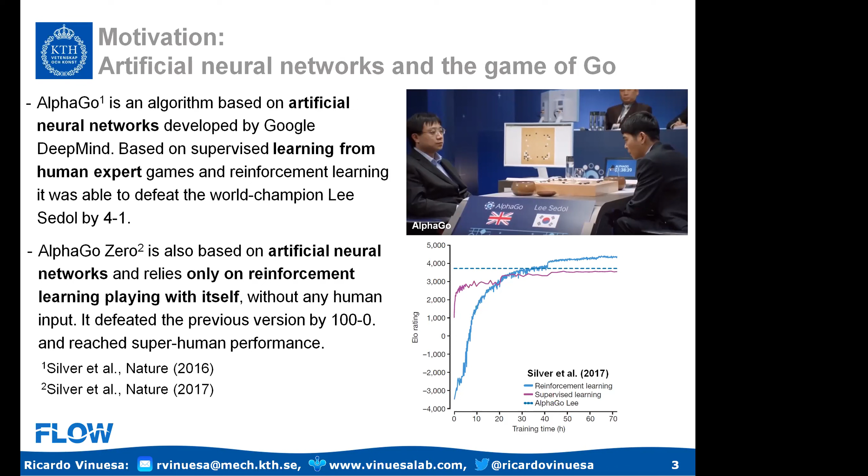So in less than 2 days playing against itself, this algorithm was able to achieve superhuman performance. And what is more interesting is that it did not get any information from human games, so it was able to develop novel strategies basically on its own. It's actually quite promising in the context of machine learning that we can get many different areas that can have positive benefits from this technology.

We have a recent review in Nature Communications from a couple of years ago where we looked at all the SDGs, the Sustainable Development Goals of the United Nations, to see what was the potential, both positive and negative, of machine learning and deep learning methods. We saw that 79% of the SDG targets could be positively affected by AI, where the environment has quite positive potential, and perhaps society can have some negative effects, which we are all well aware of.

So there is quite some potential in a very wide range of areas. The SDGs are very broad.

In particular, I would argue that the issue of interpretability is essential. Deep learning models, as many of you are aware of, are not interpretable. They're essentially black boxes where you get inputs and then you get outputs, but it's very difficult to really know what's going on inside.

And what we advocate for is the usage of interpretability methods. There is some work, and you can see we have a paper in Nature Machine Intelligence from last year where we look at these things. You can also refer to Cranmer and others, where you can actually get from the structure of the network symbolic equations that give you a pretty good idea of what the network is actually doing.

And if you're going to use deep learning methods for applications that affect you in your daily life, then it should be interpretable, because otherwise you are in trouble, right? This, of course, has important implications in design. Same thing if you want to control the flow, or if you want to design an algorithm to modify properties of the mechanism that you're working with, then you want it to be interpretable.

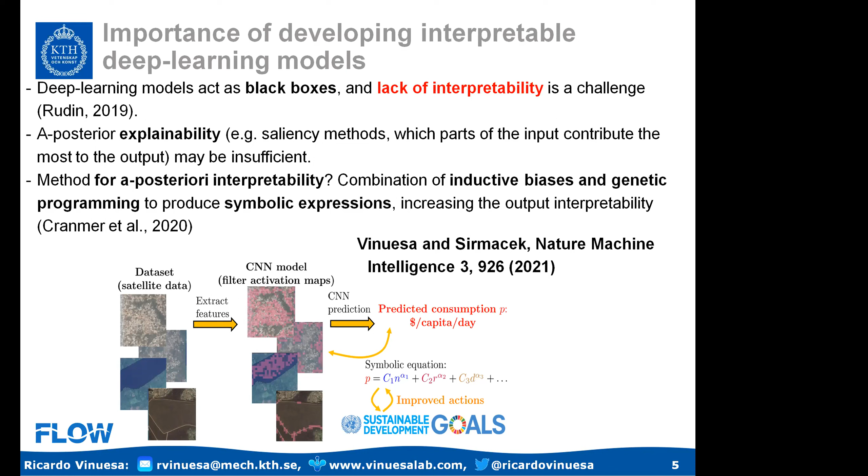So essentially, if you look at fluid mechanics, which is the main topic of today's talk, there are many areas where machine learning can really help. There is the pioneering work of Milano and Koumoutsakos 20 years ago, where they were able to model the near-wall region of a turbulent channel with neural networks.

There is work on subgrid-scale models for LES. There is work on definition of inflow and boundary conditions with machine learning, which can potentially make your simulations much more efficient. There is quite some work as well on turbulence modeling, quite interesting, and I will also get back to it later in the talk.

You can use what is called PINNs, physics-informed neural networks, where you are using the governing equations, the Navier-Stokes equations, to enhance your predictions and augment the data that you are collecting. And also in the context of flow control, there are many areas that are quite prominent, where machine learning can really give us alternative solutions and help us get better performance.

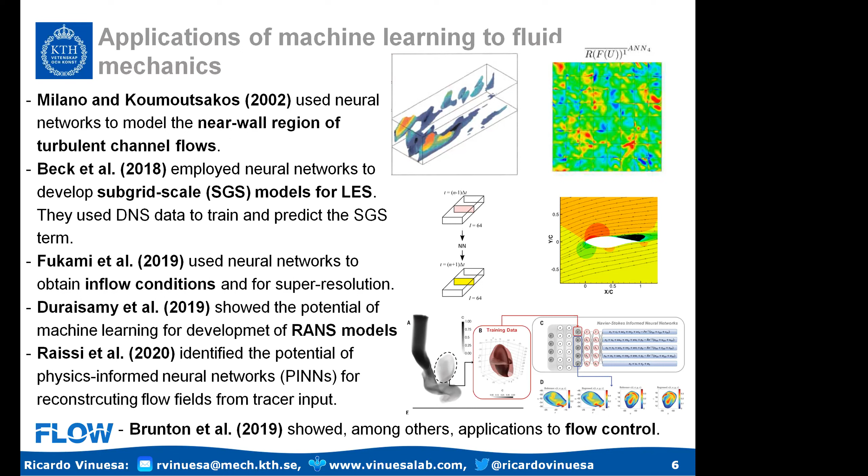So here, what I will be discussing today is a number of problems within fluid mechanics that are related to control and modeling, where deep learning really helps us, and it can outperform traditional methods that have been deployed for this type of application. One of them is what we call non-intrusive sensing.

Non-intrusive sensing, what it implies is that you have a flow. Let's imagine that you have a turbulent channel, and this is the wall, and you want to measure in the channel without disrupting the flow that you have in a certain region. One possibility to do that is to measure at the wall, because the wall is not intrusive, and based on the wall measurements, you can predict what happens above the wall, right?

And that's basically, why is that important? It's important for different reasons, but one of my motivations is closed loop control, because if I know what's happening above the wall, then I can design an algorithm that can control the flow better. And it's much easier to measure at the wall than to measure above.

So what we're going to do is use some quantities that we can measure at the wall, and we're going to use deep learning methods to predict at different distances from the wall, which will, in a way, separate different types of scales that are going to be relevant to different types of control.

By the way, the details of this you can see in Guastoni and others. So this is the reference.

Essentially, what we want to do is obtain DNS data. We're going to conduct a direct numerical simulation. This example is a low Reynolds number, 180 open channel. For simplicity, we only have the dynamics of one wall, but this will apply also to a normal channel. We have the symmetry condition at the upper boundary of the domain, and we're going to use this DNS data to train a deep learning model so that we can do non-intrusive sensing prediction.

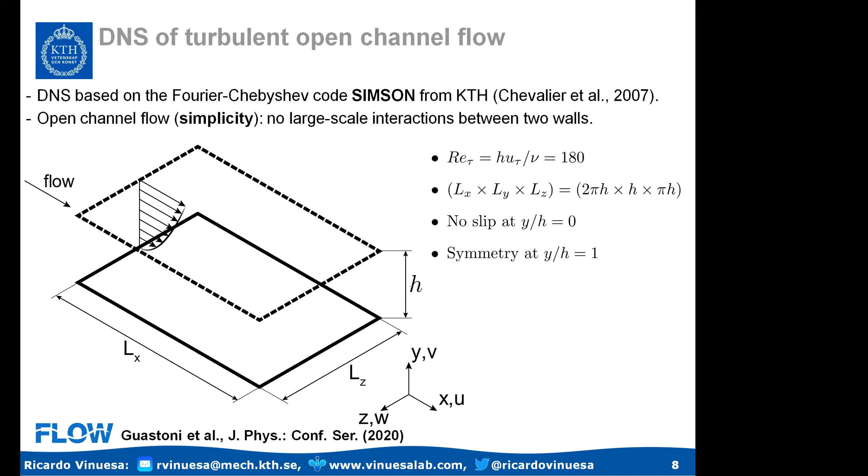So in practice, what we do is basically choose a deep learning model that is going to be beneficial to computer vision, because turbulence, for the ones who work with turbulence, is highly structured. You have a range of scales, a cascade of energy transfer. There is a hierarchy there, and very well-defined structures that one can try to exploit to make predictions in the flow.

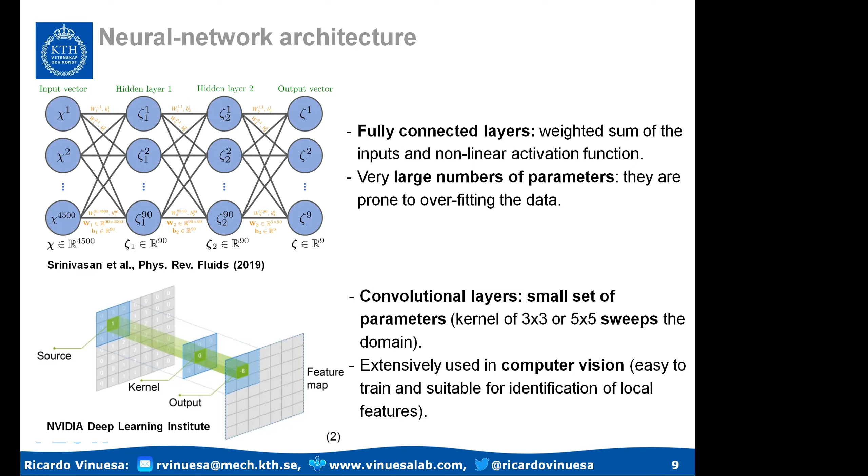Going back to our example, we're going to take several quantities at the wall, which will be displayed over here. In fact, we're going to take 3 quantities at the wall: the streamwise and spanwise wall shear stress, plus the wall pressure. And we're going to predict, at different planes above that wall, the 3 velocity fluctuations: the streamwise, wall-normal, and spanwise velocity fluctuations.

The connection between those 2 planes will be done through a convolutional neural network first, and then I will tell you about more complicated models.

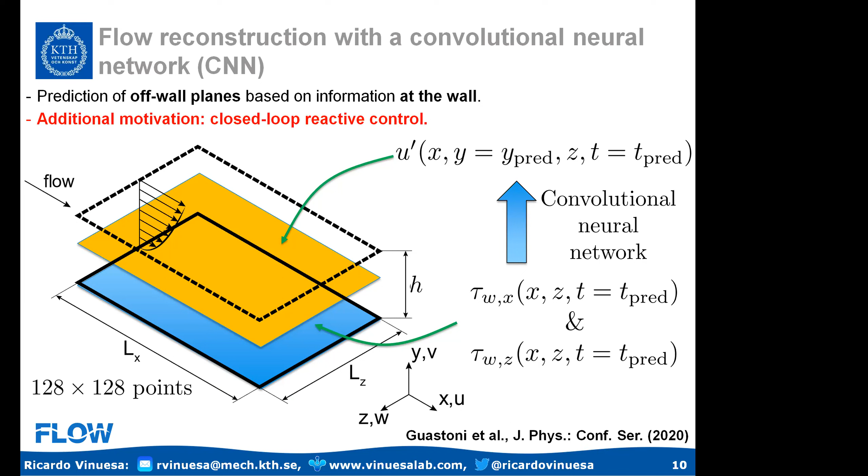So how does this network work? What we have is an input of 3 channels because we have 3 quantities. These inputs are images taken from the DNS, and depending on the Reynolds number—for a low Reynolds number you have 128 square grid points, but this can go up very quickly as you increase the Reynolds number. The output is also 3 images with 3 channels, because you have 3 quantities that you want to predict. I take an input which is an image, and the output is another image, and all of those images have features that are going to be picked up by the network.

So we have in this example 6 hidden layers. We have many different architectures, but I'm going to show you this one now. These numbers represent the number of feature maps that you have on each layer. So what this means is that in the first filter, I have a depth of 2 or 3, depending on how many input channels, and I apply a total of 64 filters because I want to get 64 feature maps on that first convolution.

What is interesting from this? Each of those filters or feature maps are going to be identifying different features of the input. For example, in the first layers, we could be looking at edges, circles, or shapes that are very simple in that input.

And as I go deeper into the network, I'm going to hierarchically build more complicated features. I'm going to take those lines and circles and build more difficult shapes based on the simpler ones, because convolutional networks are very good at learning hierarchically. So you always get that distribution: at the beginning, very simple, abstract things that progressively get into more complicated things.

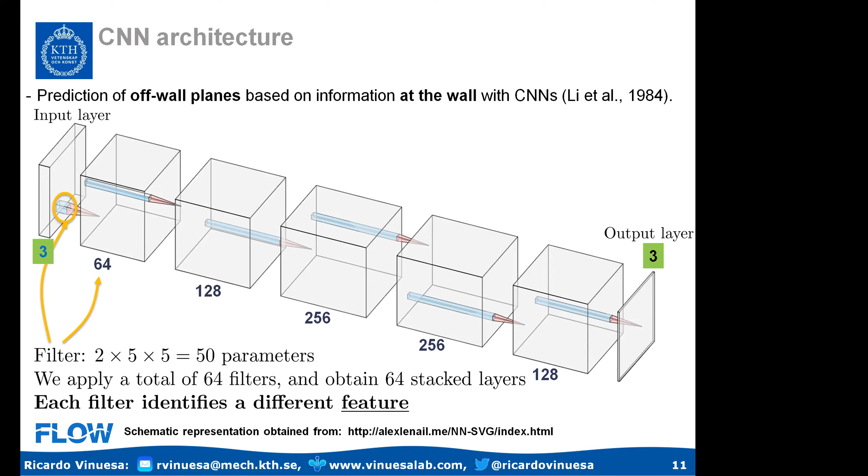And that's a little bit how one can interpret the predictions of the CNN, the convolutional neural network.

So one example we have is at Reynolds tau 550, again a turbulent open channel. It's not a very high Reynolds number, but the advantage is that it's high enough to still have a scale separation. So you actually have meaningful turbulence, and therefore you can see how the predictions change when looking at the near wall region versus the outer region, and how those different scales are interacting there.

All these results are published in JFM, so you can go to Guastoni and others to see everything we have there. On the left, we have the three quantities at the wall: the two wall shear stress components and the wall pressure. And on the right, we have the three velocity fluctuations at different wall normal locations, different distances from the wall.

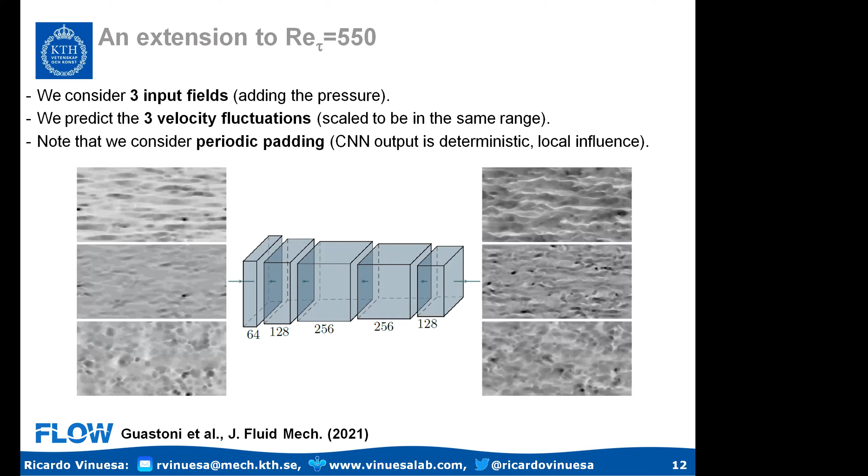So we have two methods to predict. The easiest and most straightforward approach is to use a fully convolutional network. I take an image, which is the wall, and directly predict another image, which is the plane above the wall. That can be close to the wall or far from the wall, just using a purely convolutional neural network.

But we have also developed another method, based on first doing a POD, a proper orthogonal decomposition. When you do this, you separate the spatial temporal information of the flow into spatial modes, which are fixed, and temporal coefficients. Then if you use this FCN-POD method, you're only predicting the temporal coefficients, since you already have the spatial information. And that for some cases is helpful.

We're going to look at it in a second, to see for which cases the FCN is helpful, and for which cases the FCN-POD actually gives better performance. You can find more information about the FCN-POD in this reference.

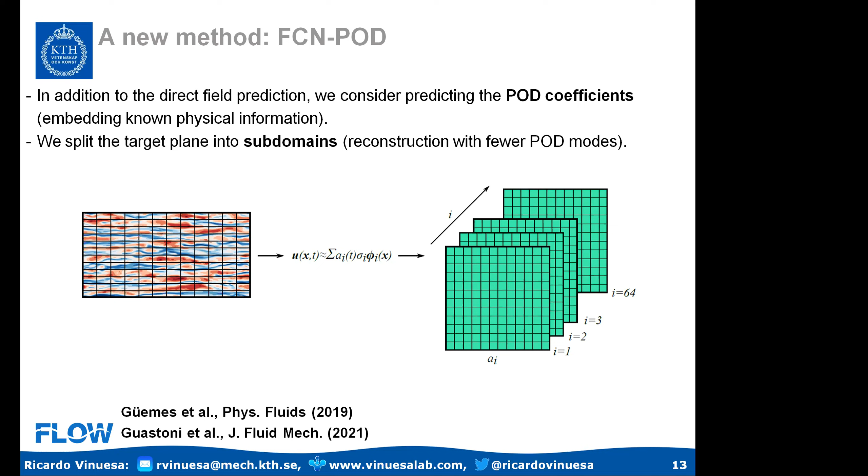You basically have very large scales which have their feet on the wall, and that footprint is essentially a linear process. So if you have a linear method to predict from the wall what happens above the wall, you're going to be predicting the superposition. But there is another phenomenon, or number of phenomena, which have to do with modulation. And the modulation is highly nonlinear and has to do with interactions among different frequencies, because it's a multi-frequency phenomenon. That cannot be predicted by linear methods.

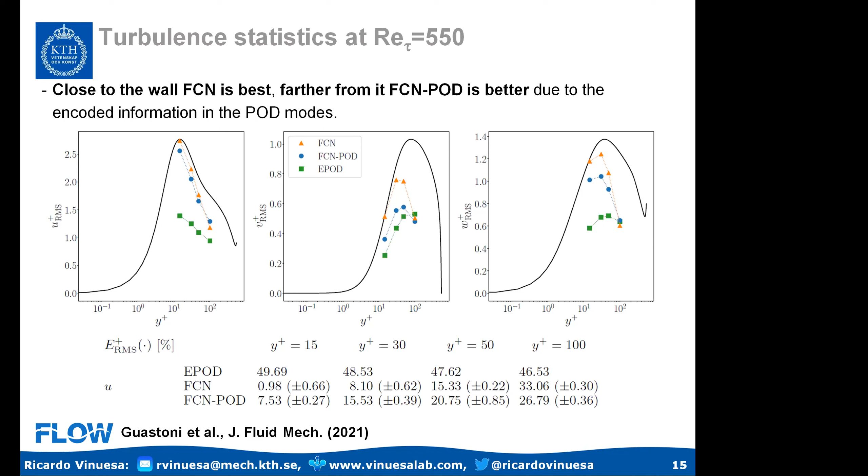Now, something I think is quite interesting is what we call transfer learning. Transfer learning means you can use what you've learned in one scenario, one problem, and use it in another problem. You can transfer that stuff that you have learned. We have two examples of transfer learning.

The first one is at low Reynolds number, at Reynolds tau 180. We train one network to predict at y plus 15, so basically from the wall to very close to the wall. Now we want to predict at y plus 50, farther away from the wall.

What we can do is take the weights of the network we used to predict close to the wall. We take the first three layers and freeze them, using the same weights for 15 and 50, and only train the three last layers.

Why do we do it like that? Because the first layers of the network identify more abstract, simpler things, basically smaller scales, while the last layers look at more complicated, larger scales. So here we have the underlying assumption that the small scales are similar close and far from the wall, while the larger scales are different.

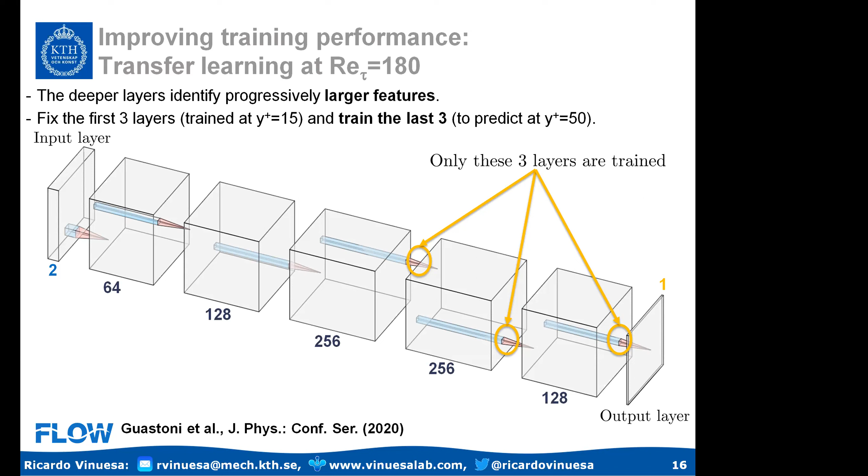If you compare the results with the case where the y plus 50 network was trained completely from scratch, we can get the same level of accuracy, the same level of error, but reduce the training time by a factor of more than 4. So by transferring what we learn close to the wall to far away from the wall, we can save a lot of training time and training data, which is another important aspect of deep learning applications.

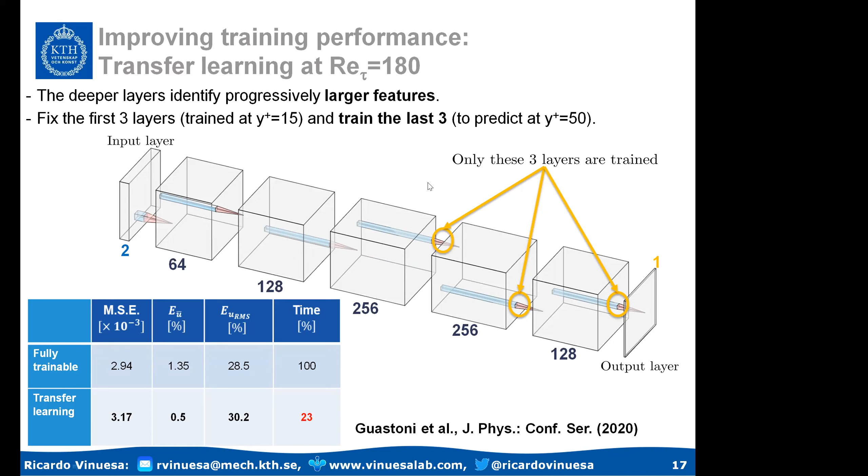We have another example of transfer learning, which I think is the most interesting one. We do the analysis at Reynolds star 180. We train a network, and now we want to train another network to predict at Reynolds star 550.

What we can do is take all the weights from the Reynolds star 180 case, and start the training at 550 not from random values, but from the values we had at 180. So in a way, I'm already closer to a good solution, and then I can see how that affects my training process.

If we compare different characteristics of the training data set, the idea is I can obtain the same results when I transfer the weights as when I start from random weights, but I can reduce the training time again by a factor of 4. So basically, I can use 4 times less data at higher Reynolds numbers for the same prediction.

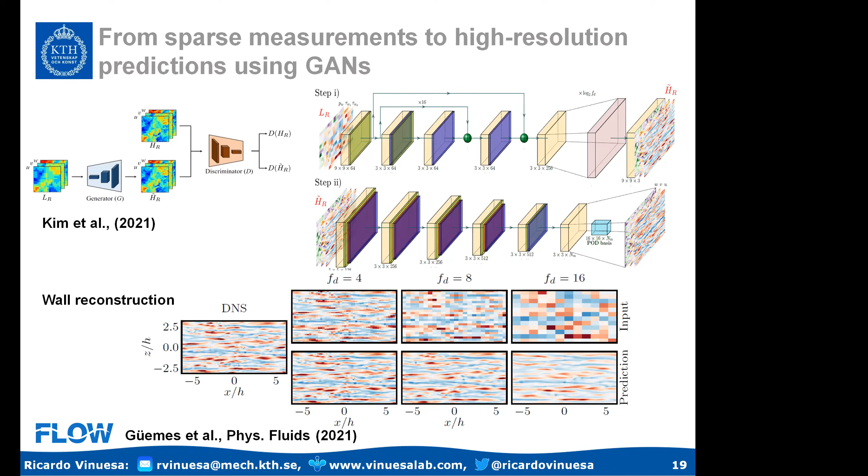This is actually quite interesting, that from something like that I can obtain this. It's quite encouraging. By the way, all of these results you can find in Güemes et al. — this is a paper from Physics of Fluids that we published last year, so all the details of the architecture are there too.

Once again, of course, I have a lot of attenuation of the fluctuations, but I know where the large scales are, where the streaks are located, their spacing and their sizes. So it's an interesting prediction of the flow, which I can use for flow control eventually.

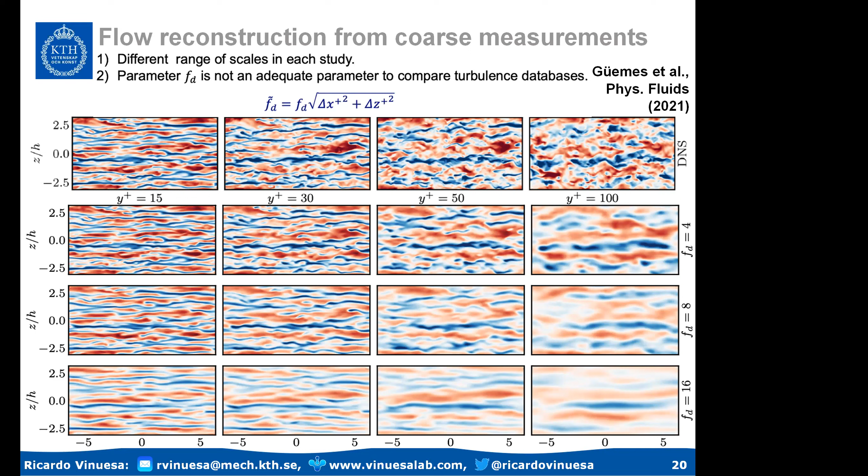So if you want to predict with very coarse inputs, then GANs is a good approach because that allows you to obtain some super resolution.

Now, the next application I'm going to talk about is the opposite prediction. So far, I've explained how we can take information at the wall and predict what happens above the wall. What I want to do now is take information above the wall and predict what happens closer to the wall. And why is that interesting?

There are several applications where that's interesting, but one is the definition of off-wall boundary conditions, which is quite popular in climate simulations and things like that. Those who do DNS, or generally turbulent simulations, know that most of the resolution is devoted to solving the physics close to the wall, because that's where you have the smallest scales. But not only that, that's also where you have most of the production at moderate Reynolds numbers. But if you can, knowing what happens over here, predict what should be happening here, and use that to set a boundary condition, then in principle whatever happens below that point can be saved. You can have a much computationally cheaper simulation.

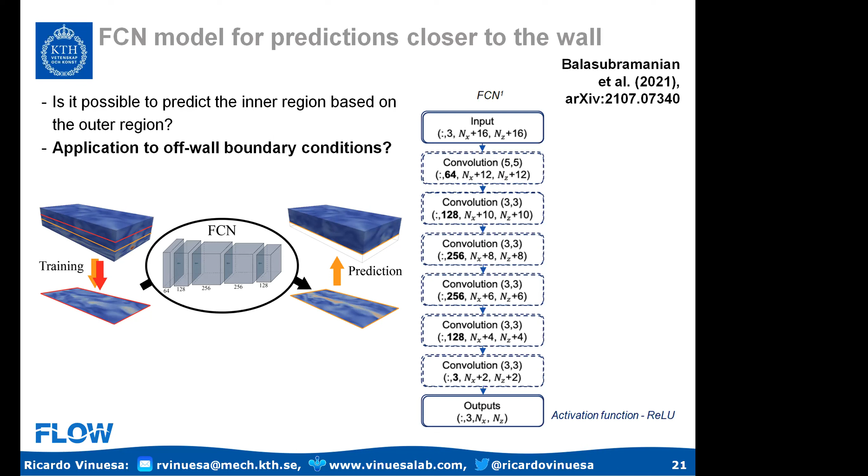The first one is the receptive field. When you're predicting close to the wall, you're using small things as input which fit in your receptive field. But when you predict far away from the wall, you have a very large scale structure, and your receptive field represents only a small part of that input, so I cannot very effectively exploit the initial information I have as input.

The second problem is the problem of missing scales. When you're predicting from the wall, it turns out that the large scales have a footprint here that in a way gives you information about modulation, about superposition. So you know a lot about these larger scales when you're looking at the wall. But when you do the opposite, when you try to use this information to predict what happens closer to the wall, you don't have that information. So you're predicting with less information something richer in physics. It's a bit more challenging.

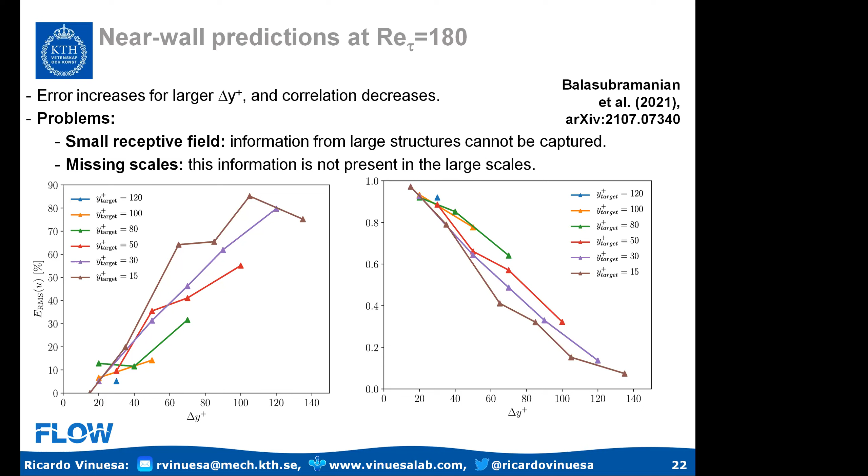What you can do, if you look at our predictions - and this is, by the way, inspired by work from Mizuno and Jiménez, where they did this simply by rescaling - they have the plane here, and they just rescale to see what should be happening over here. We try to do that, but with convolutional neural networks.

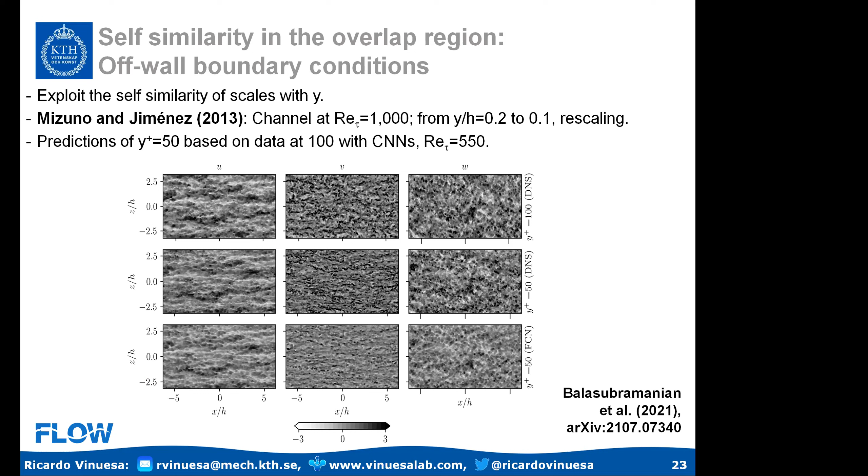If you look at the results, this is my input plane at y plus 100. This is the reference at y plus 50, so this would be the boundary condition plane. And on the third row, you have the predictions. You can actually see that the predictions are pretty good in principle - I'm able to construct most of the fluctuations, most of the details of the structures. But still, to make this work in a simulation, you would require a very detailed result at that input plane, which is not so straightforward to achieve.

But to do it in the context of boundary conditions, one needs to find alternative approaches. Some of those approaches we're investigating include using, for example, max pooling in the first layers, because that can bypass the problem of the small receptive field, and you can maybe use a more GANs-oriented approach to reproduce the small scales missing in my predicted fields. So those are directions that can be explored. All the details of this can be found in this paper on arXiv, so this is something you can access if you're interested. It's a direction that is quite promising for deep learning in order to enhance computer simulation.

Another area which I think is quite interesting when using CNNs is modal decomposition. If you do POD, the proper orthogonal decomposition, you obtain a linear reconstruction of the flow where those modes are actually orthogonal.

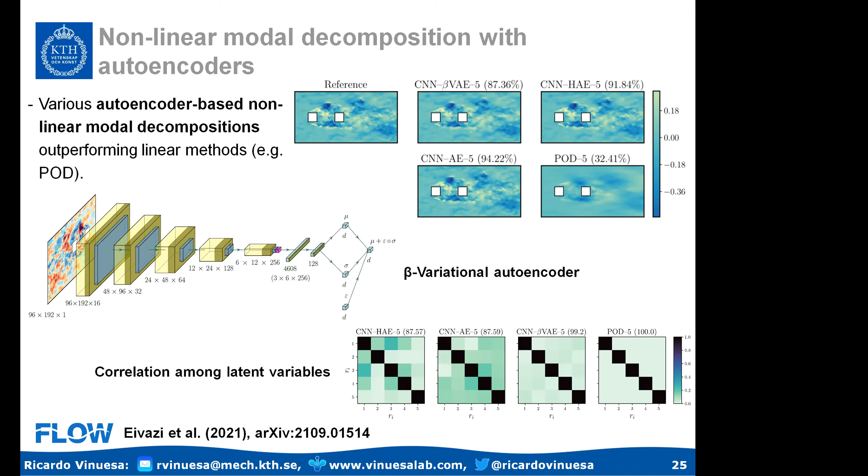This has quite some potential in the context of model reduction, because turbulence is very complex, so you always want to reduce the dimensionality. For reduced order models, it can really help you develop more efficient control strategies later on. So this is something that can be quite promising.

And then we have the area of PINNs, physics-informed neural networks, where we also have some collaborations with Esteban and some of the people attending the talk. So it's another interesting area, and we have an article where we apply PINNs to RANS, to Reynolds-averaged Navier-Stokes equations.

So what do we do? We take the 2D RANS equations, the steady version of the RANS equations, and we include the Reynolds stresses without any model. We just put the Reynolds stresses there because we want to avoid the inaccuracies associated with eddy viscosity models — we want to be able to just solve the RANS equations and see what's the contribution of the Reynolds stresses.

The advantage of PINNs with respect to other numerical ways of solving the equations is that you don't need to solve the very fine gradients that other approaches require. This is because PINNs are based on automatic differentiation, embedded in the training process of the network itself. When you train, you're minimizing the loss function with respect to the weights in your network, so you need partial derivatives and the chain rule to do the training.

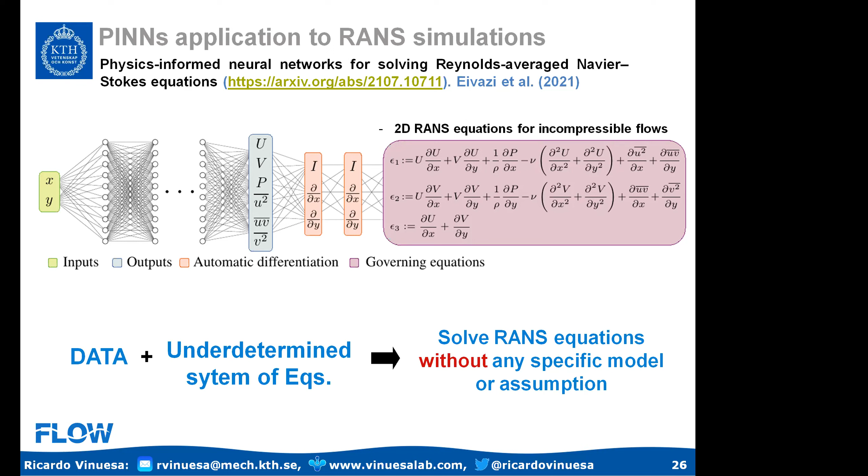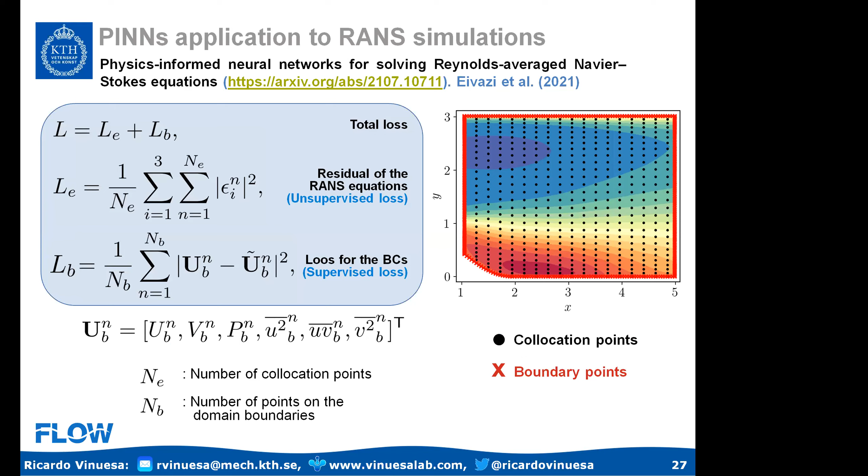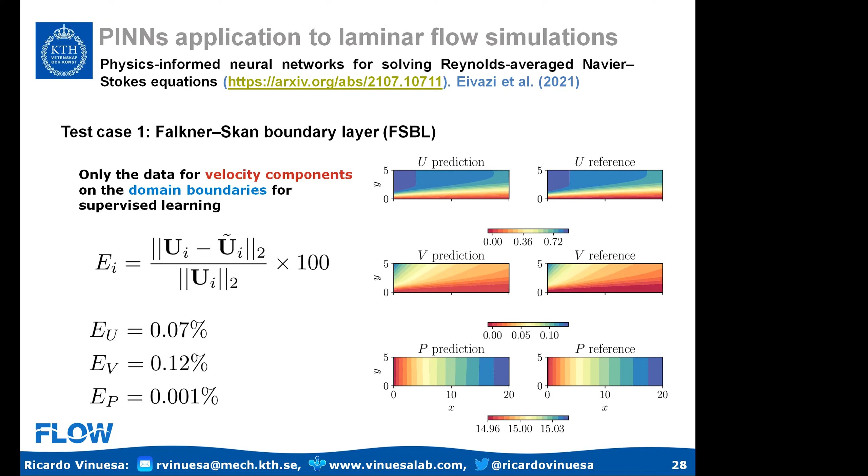You can apply this methodology to a wide range of cases of varying complexity. For example, starting with a simple Falkner–Skan boundary layer, which is a laminar boundary layer you can solve very easily, you can compare the reference and the prediction of the mean quantities and get less than 0.1% error. So a trivial case can be trivially solved with PINNs, which is a good starting point.

But more interestingly, you can go to turbulent cases. This is a zero pressure gradient turbulent boundary layer up to Reynolds theta 7000. This is a DNS, a very detailed simulation. You can see the computational domain here.

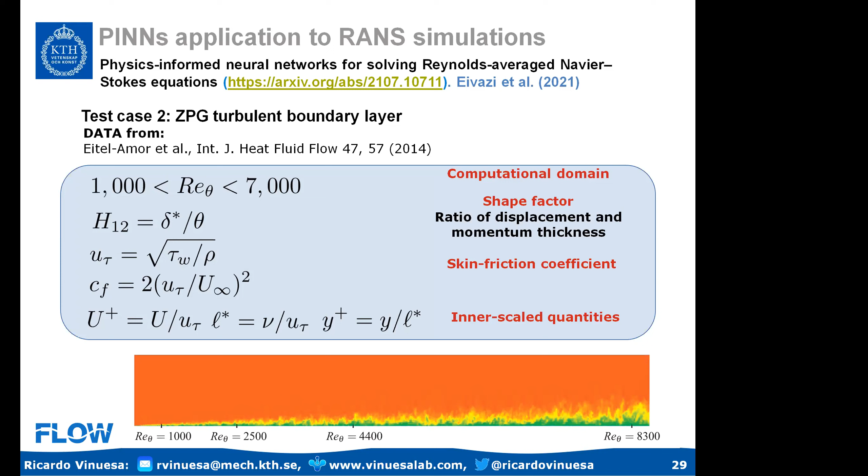Because we are using the steady RANS, what we can predict is the turbulence statistics, not the instantaneous flow. We're actually working now on unsteady PINNs, and we have quite some progress being able to predict the flow instantaneously with PINNs, which is pretty interesting. But for now, we're going to focus on the RANS results, the steady RANS results, which are the turbulence statistics.

For a ZPG turbulent boundary layer, here's the comparison between the reference of U, V, and the Reynolds stress, and the prediction. The mean flow has 1% error, which is pretty good. Even in the Reynolds stresses we have less than 10% error. You can compare the inner-scaled velocity profiles and the Reynolds stresses here. In principle, we can predict quite well.

A turbulent boundary layer with zero pressure gradient is a complicated flow case, and we get more accuracy than you'd be able to have in a RANS-based simulation. The key is that we are not modeling the Reynolds stress; we are just solving it as part of the equation.

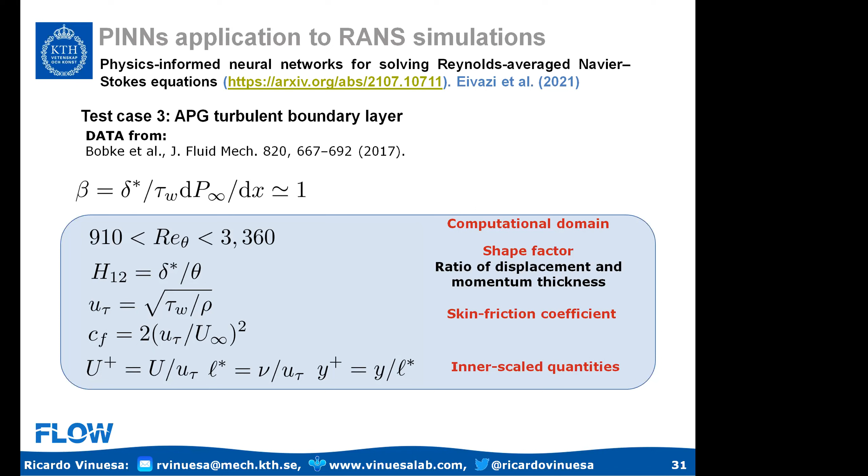More interestingly, if we go for more complex cases, for example a turbulent boundary layer with a pressure gradient, you can see the information in Bobke and others in JFM. We have picked a boundary layer with a constant pressure gradient, so this is near equilibrium, and the Reynolds theta gets to 3000, which is reasonably high for numerical data.

This is a more challenging case because the flow is decelerated, so you get much more complex streamwise development. The mean flow has an error of 0.3%, so again we nail the mean flow and get very good representation of the skin friction and shape factor. Even the Reynolds shear stress we get with less than 10% error, which is a quite remarkable result because this is now a more complicated case.

This is not something you can so easily simulate with an industrial RANS. It's quite interesting if you compare the streamwise development of the boundary layer, even the Reynolds stresses, because we can characterize pretty well the turbulence quantities and nail the Reynolds shear stress. This is already a more complicated flow case, but we can go for even more complex cases.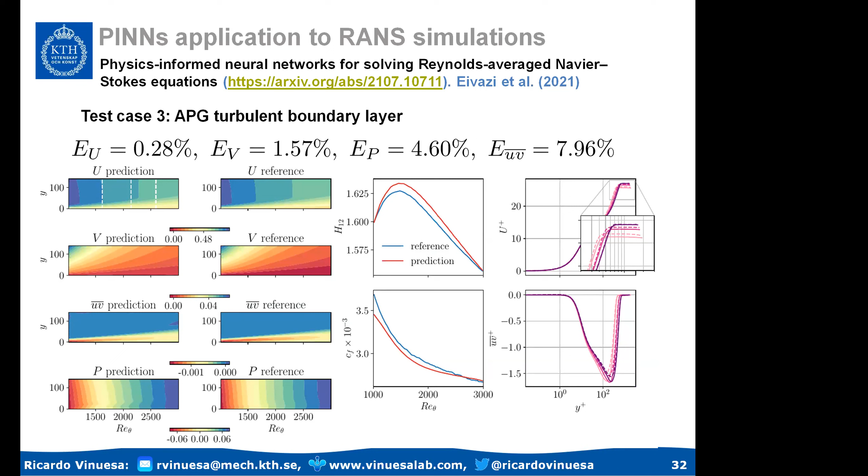This is the turbulent boundary layer on an airfoil, a NACA 4412 section. You can see the details of the simulation in Vinuesa and others, published in the Journal of Heat and Fluid Flow some years ago. We have a database of DNS-like resolution up to Reynolds number of 1 million, which, by the way, is what you can achieve in most wind tunnels—so we can actually do DNS at quite high Reynolds numbers. We've picked a case of Reynolds number 200,000, where you can see the complexity of the flow we are trying to model.

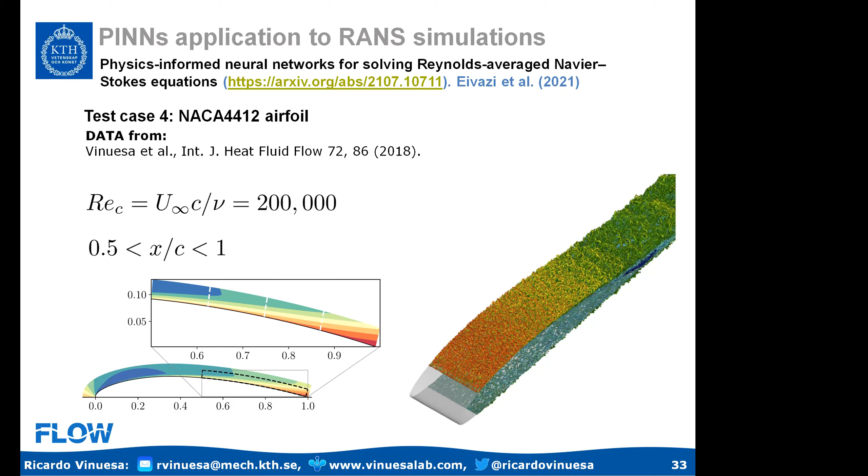This is something that with industrial RANS starts to get more challenging—it's not clear you'll be able to predict this reasonably well with industrial RANS. What you see here are the various Reynolds stresses. In the mean, we get 1.5% error, so we're able to predict extremely well the mean flow. And even the Reynolds stresses, with around 10% error, which is quite interesting, because with industrial RANS we would not have a chance to get the Reynolds stresses nearly as close as what we get here.

We have a little bit of over-prediction in the outer region, because that's where the most complex physics is taking place. But still, we're able to get pretty good Reynolds stresses, again at the cost of something you can run on a laptop during a coffee break. This is something that is quite computationally cheap.

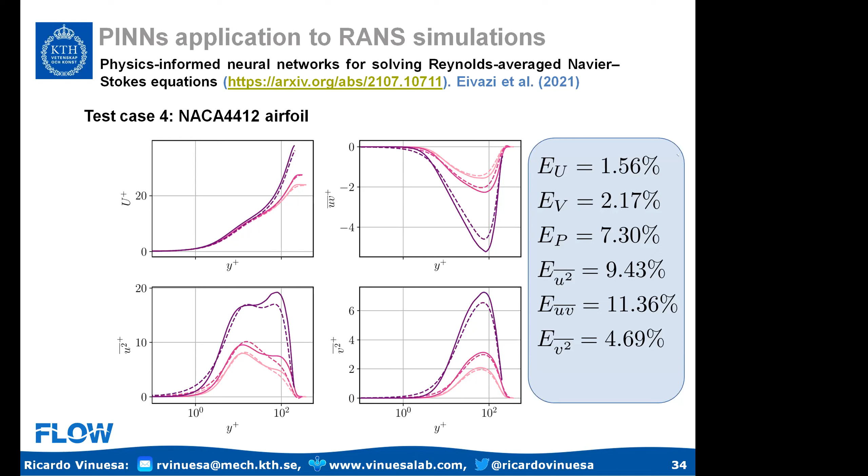Even more complicated is the case of the periodic hill. The periodic hill is one of those test cases that's very popular for modeling because it has separation, reattachment, and complex 3D structures. This is a periodic case, but you still get complex 3D structures, and it's also difficult due to the pressure gradient effects present in this flow case.

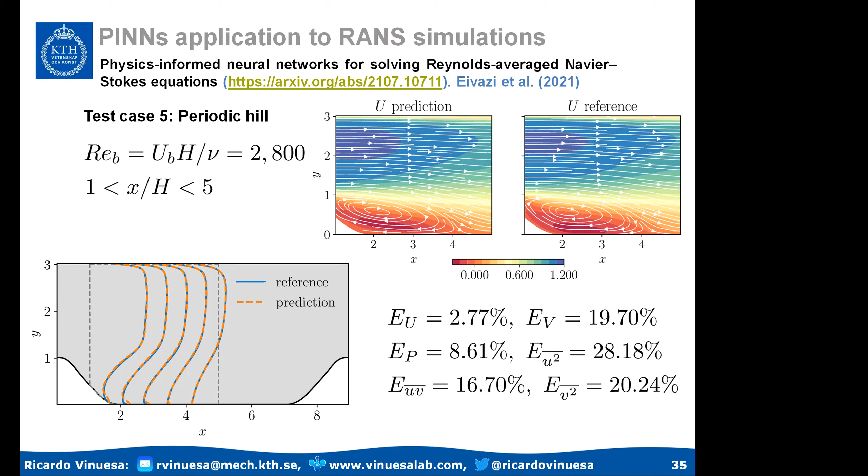So when it comes to RANS, there is quite some potential to model flows, and to model other areas that we're working on. And now, as I promised at the beginning, we're going to talk about reinforcement learning.

I have some projects and directions on using reinforcement learning for flow control, essentially. Reinforcement learning is a type of machine learning methodology in which you have an agent—which in this case would be our neural network—and an environment, which would be the CFD solver. That agent needs to be able to interact with the environment.

So this agent performs a number of actions on the environment, and those actions are in principle chosen randomly, but within a trust region—you define a set of parameters that can be modified. Then the agent sets a number of actions on the environment, and what happens is that the environment changes, so the state of the environment changes.

And the environment is also providing a reward. A reward is basically a measure of the quality of those actions under a certain norm, whatever the norm is. If you want to minimize the drag of an airplane, then the reward is minus the drag. If you want to minimize the separation length, then that's your reward—you need to maximize a certain reward. The point of reinforcement learning is that the agent will interactively engage with the environment and will progressively converge towards a certain policy.

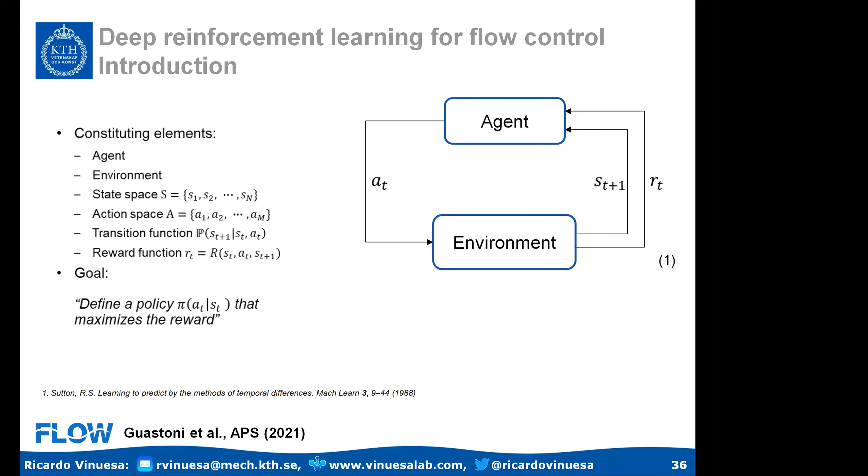This is something we presented last year at APS, and now we're working on several papers on this. The problem we chose first is reducing the separation length of a 2D recirculation bubble. So we have a 2D channel.

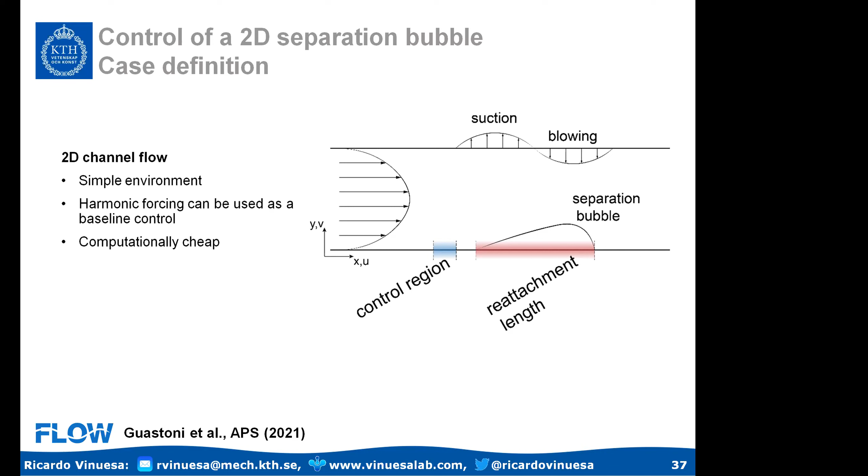We impose suction and blowing, so we can separate and reattach the flow. You have a control region upstream of that bubble. What we can do in that control region is basically blowing and suction, so we can inject flow, or we can absorb flow from the main domain of the channel.

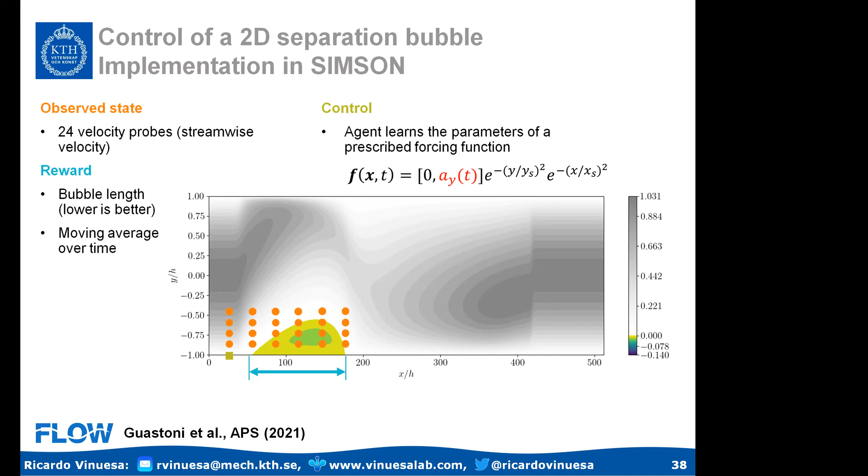For this problem, the usual approach is periodic forcing. You basically look at the most unstable modes, or the least stable frequencies of the flow, and you force with that frequency. The idea is that the reinforcement learning would hopefully come up with something a bit more sophisticated, a bit more complex.

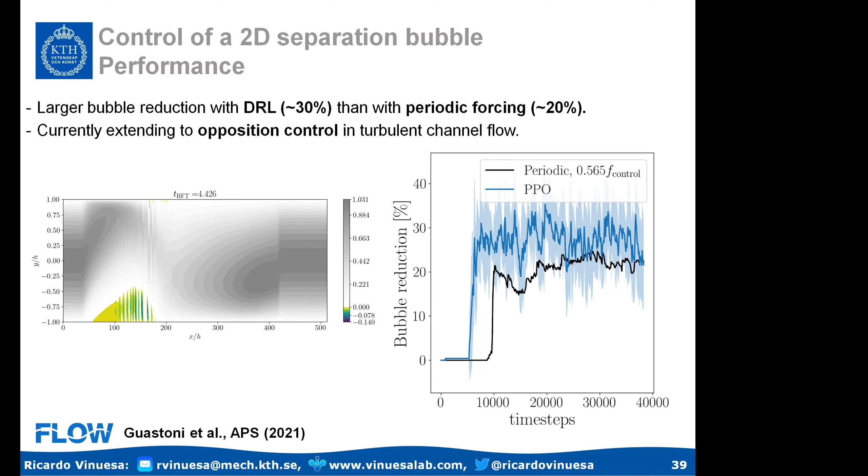On average, the DRL performs better than the periodic forcing. The periodic forcing gives us around 20% reduction of the separation length, whereas the DRL gives us around 30%. This is for a very low amplitude of control, so if we increase the amplitude, in principle those differences will increase. But for this small test case, DRL seems quite promising because it's giving us novel control strategies that, in principle, go beyond what can be achieved with classical flow control methods.

Okay, and those are my conclusions. This is a summary of the various topics I've told you about.

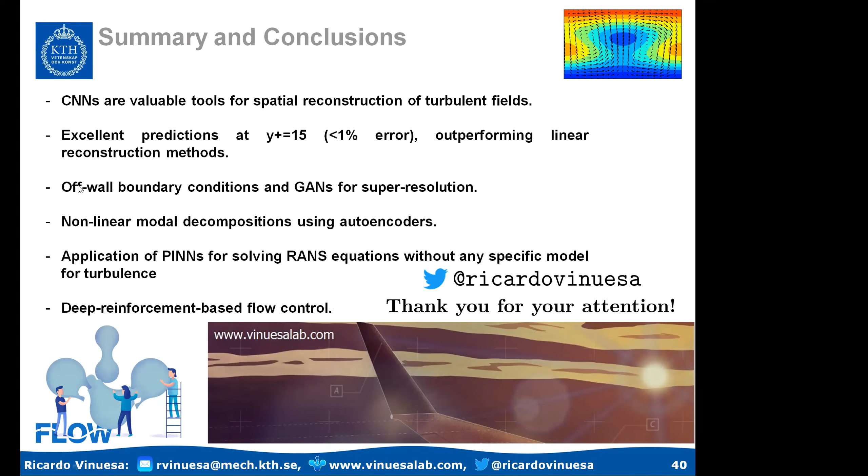I think it was around slide number 24, where you were finishing with channels. Go there. You were trying to estimate the boundary condition from the off-wall plane.

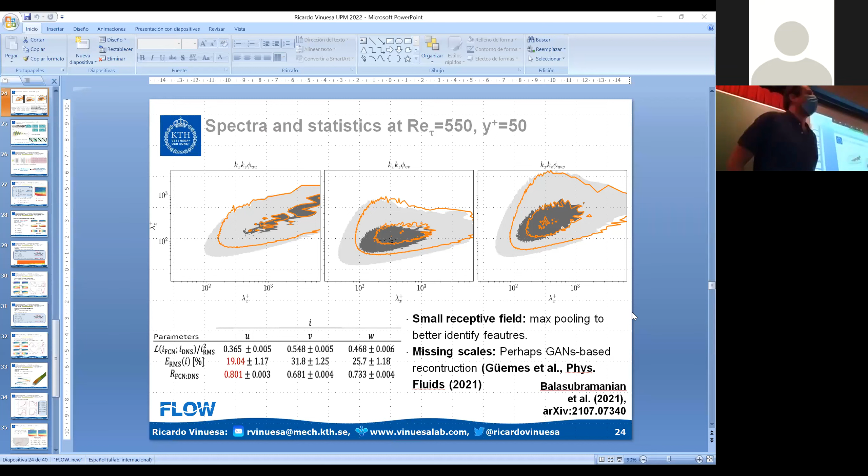How do you know there that the wall is not rough or has ripples? Of course, we didn't consider that; this is just a smooth channel, a simple channel. But if one were to develop something general enough for rough walls and ripples, then you would need to consider that in the model, probably with some transfer learning or even a more complex model that accounts for that. That's not something we are considering yet, but it's a very good point.

But my question is, how do you know that you are doing a smooth channel? Where are you putting that information in your model?

Currently, this is a purely supervised learning case. I'm using information of a smooth channel and trying to reproduce that. In principle, if you're having this in general, you don't know it. You'd have to know from the large scales something that gives you the information this is going to be predicted for a rough channel, or include that explicitly in the model, maybe with a classification step before, so you know the type of flow you're doing, and then train different models that give you different sets of parameters. So that's basically future work. It's not clear, the idea is you don't know that. You don't know that from the outside, as with the Townsend model, and it seems to work quite well.

When you are away from the wall, you don't know whether the wall is rough or not. You only know that when you are at the wall or in the near-wall region. And if you throw that away, then you just don't know it. You cannot use that because you don't know it from the data. Of course you don't know it. It would have to be that you know you want to simulate a rough channel or whatever, and then you are classifying a model with particular parameters for those cases.

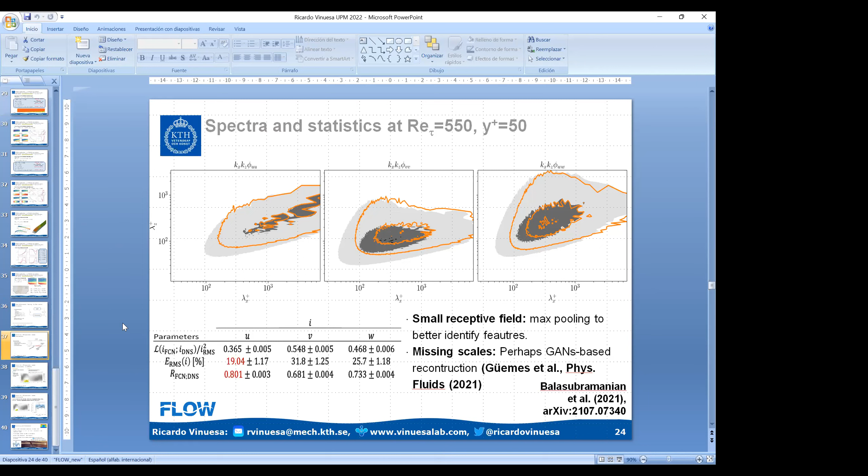Do you need to have a clear idea about some passive control mechanisms to know where to actuate? Yeah, I mean here we make the active choice of where we want to actuate, so we know how the flow is going to behave. Of course, it's good to have some baseline, some classical control that can give you an idea of what you want to do, and then that guides how you design your agent and the properties of your agent.

In the case of turbulence we are doing now, we are mimicking an opposition control, for example. So what we are doing for turbulence is you take an established control, and then what you learn is a residual with respect to that control, which helps you have a good starting point for the reinforcement learning. So certainly, whatever you know about the case and how to control it is going to help you. Okay.

The second question is, well, in turbulent flow, you cannot perfectly predict something. You always need to assume an error. How do you quantify the error? Are you satisfied with prediction higher than statistics, lower than statistics, retrospective? What do you do? The question is how do I quantify the error in turbulence, in the turbulent predictions?

It all depends on your application. My non-intrusive sensing is aimed at doing flow control, so I'm interested in having good instantaneous predictions. And then what I get is the mean square error of the fields that I want to predict on all the snapshots that I am considering.